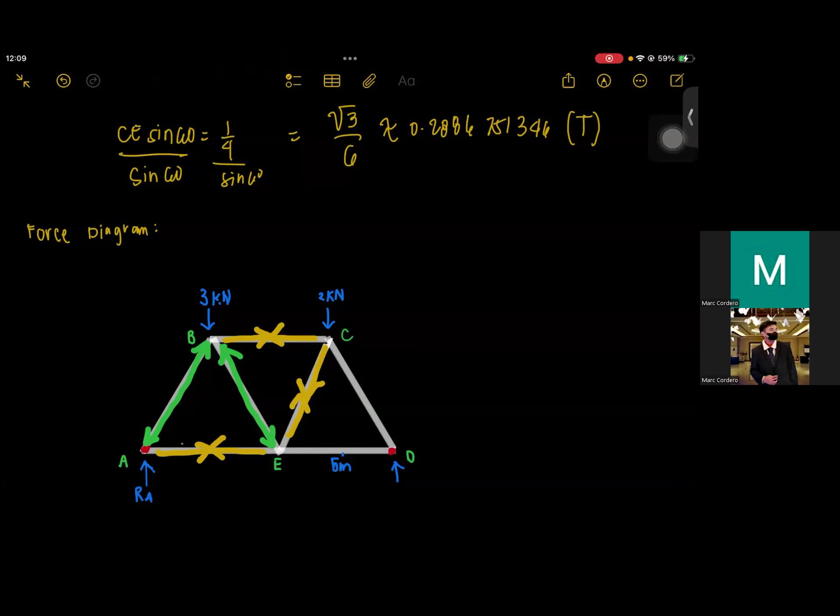Okay, at finally. CD is, I think, compression. Compression and ED, where is ED? ED is tension. So CD is compression and ED is tension.

So, that's our force diagram. Now, wait a moment. Okay?

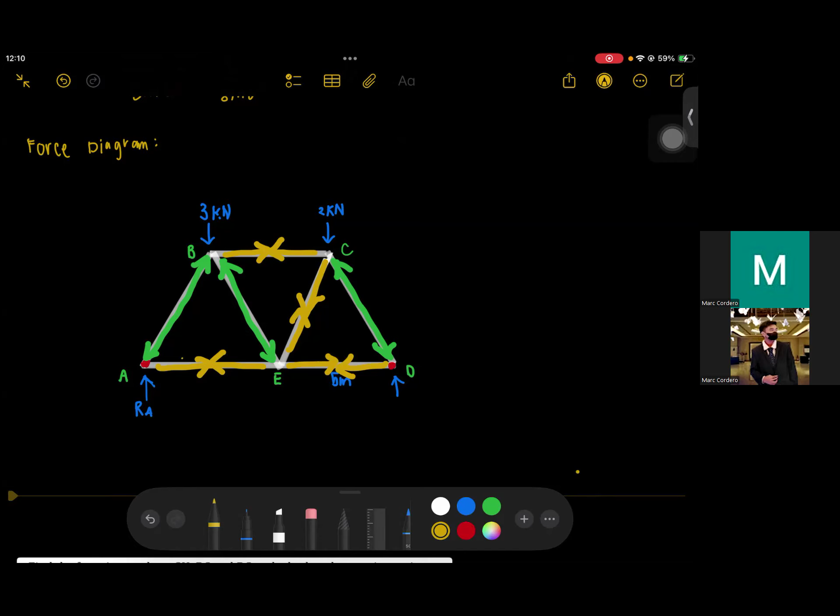So, here it says find the force in members GH, BC, and BG, and tell whether they are in tension or compression. So first, let's highlight where they are. GH is here. BG is here. And BC is here. There, they're highlighted.

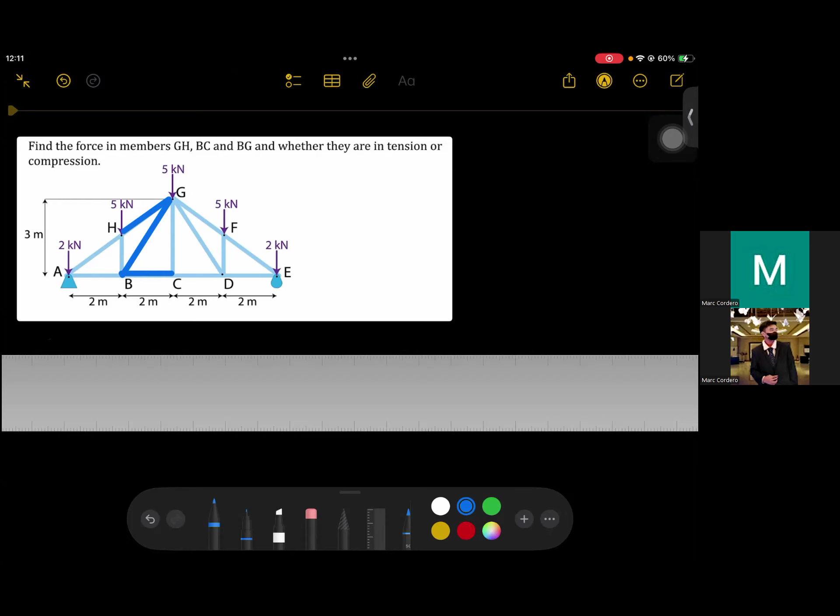Of course, in this problem, we're only asked to find several members. Therefore, that's a hint that it's better to use sections here. But it's your preference. Since we're only asked for three members, I believe it's much easier to solve using method of sections. So how are we going to solve using method of sections?

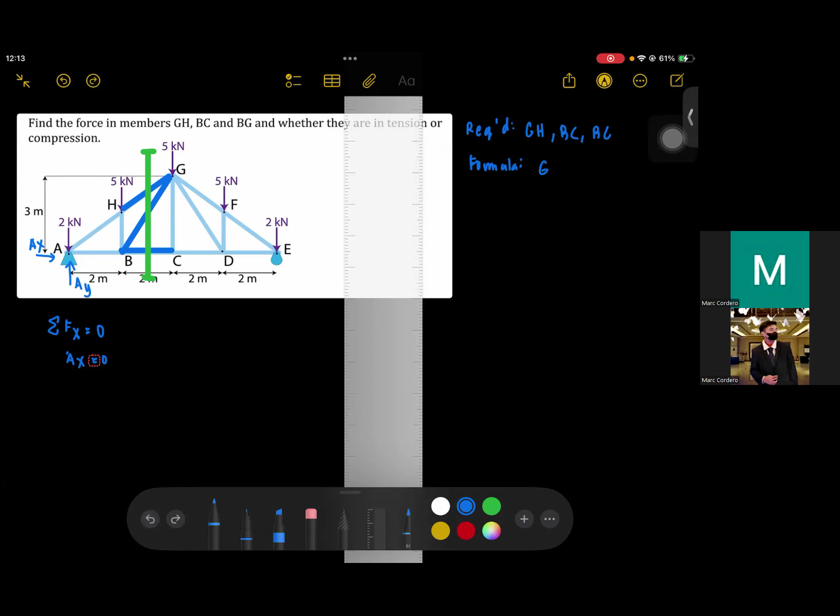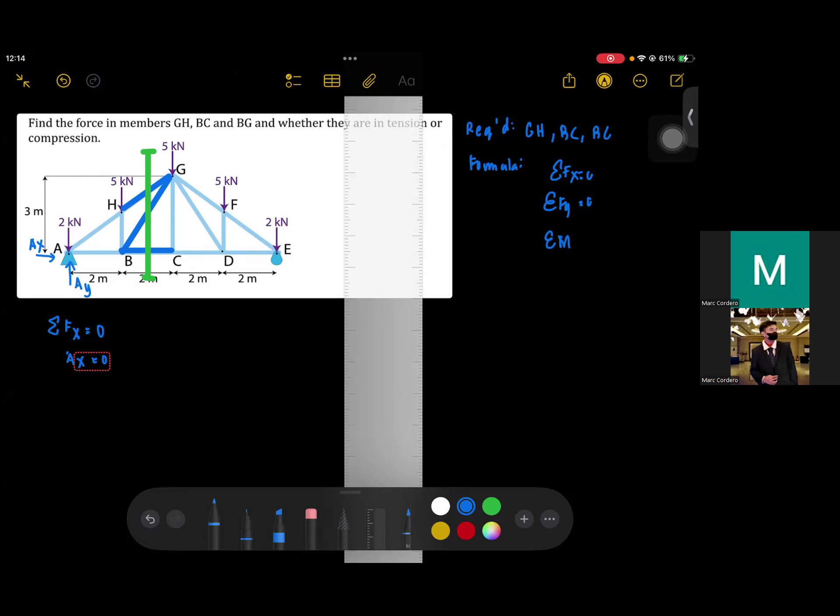Oh my God, I forgot to write the required. Sorry, required is GH, BC, and BG. And of course the formula for this is summation of Fx equals 0, summation of Fy equals 0, and summation of moment equals 0.

So, therefore with this, AX equals 0. What else? I believe it's better if I use moment and take moment at E. Because if I use summation of Fy, we'd have to consider the pin, and if I take moment of Fy, we'd also consider the roller here at E. Since we don't want to complicate things, it's better to just take moment at E so that E becomes negligible.

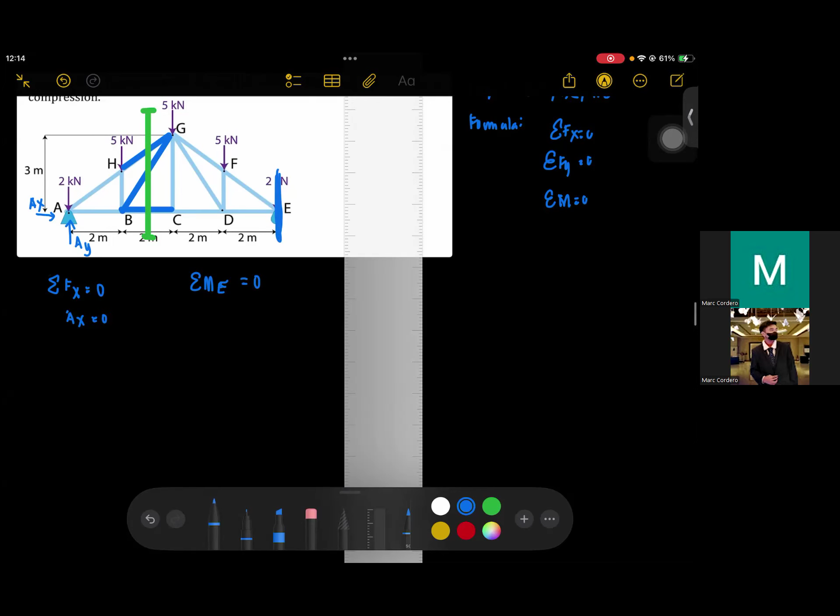Then we'll just take into account the forces that create rotation about E. So of course, AY, going up, clockwise, multiplied by 2 plus 2 plus 2 plus 2, so 8. So 8 is its distance from E.

Then we have negative 5, 6 — this negative 5 is in kilonewtons, then 6 going down, that's the distance. Then negative 5 times 4, negative 5 times 2 equals 0. Okay, now solving it: negative 30, negative 20, negative 10.

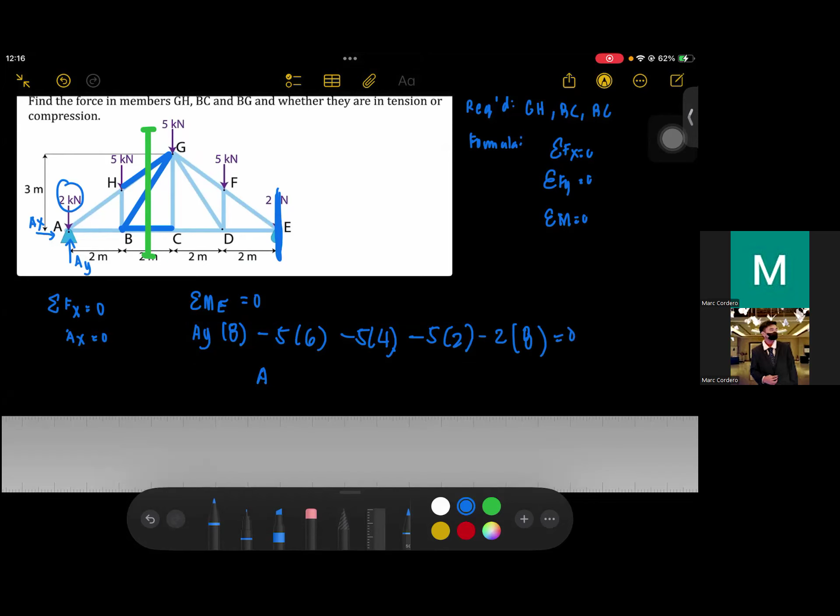I think I'm missing something. That's right, what I'm missing is the negative 2 kilonewtons going down, multiplied by 8. So plus 16, 76. 8AY minus 76 equals 0. So 76 divided by 8, AY equals 19 over 2 kilonewtons, or basically 9.5 kilonewtons.

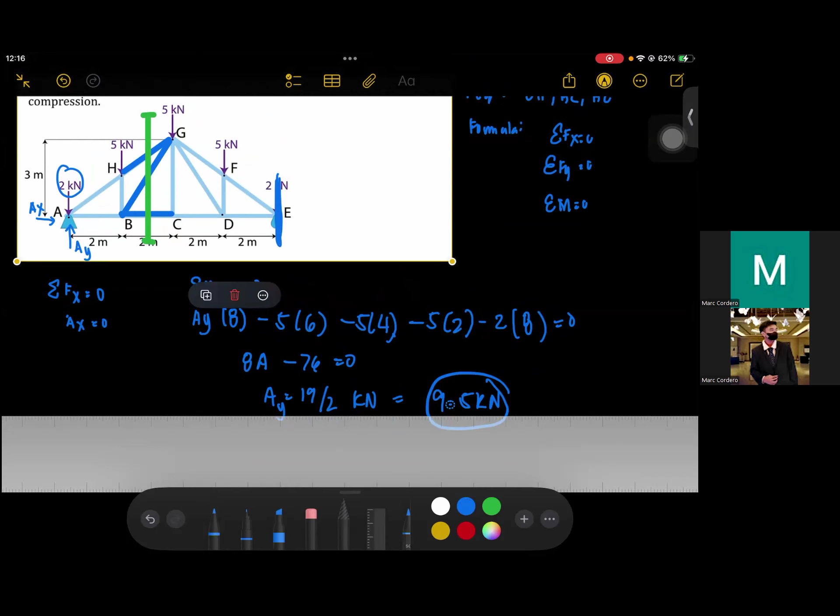Okay, 9.5 kilonewtons is AY. So now we have AY, we can cut the truss now.

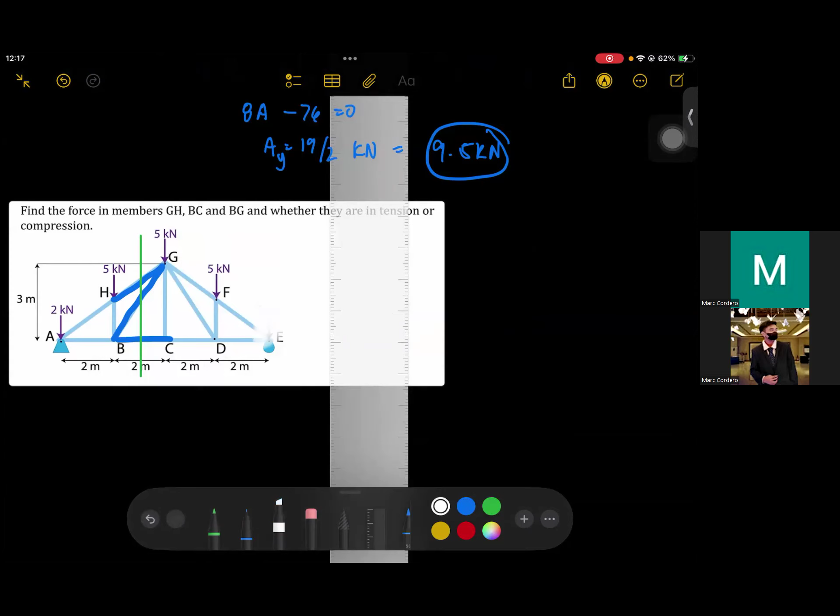GH, BG, BC. Then, there, cut. Then there, cut.

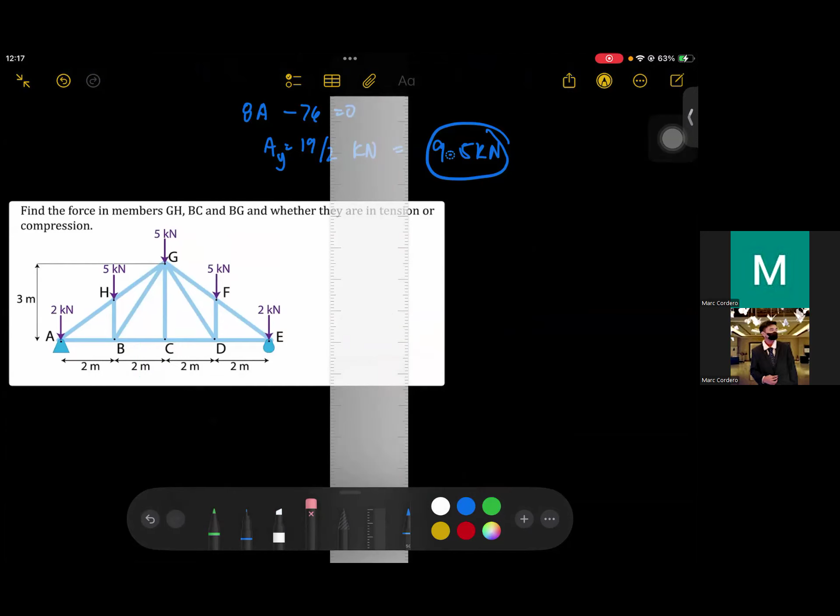Wait, let's cut it first. Now that it's cut, we can treat this as an external force.

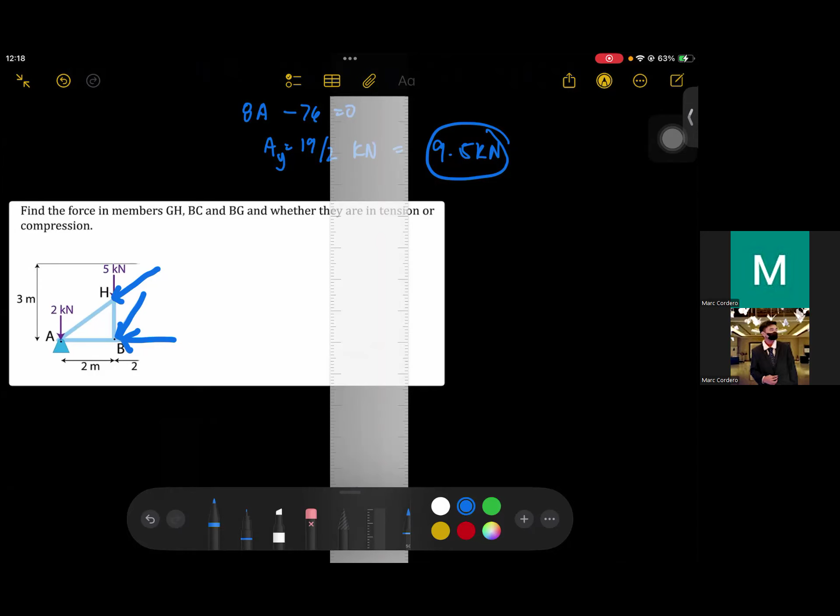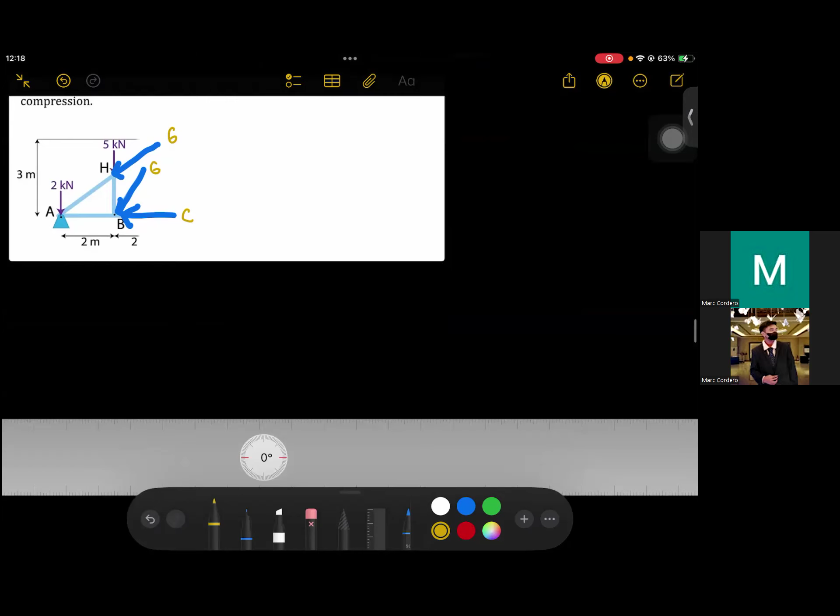But anyway, so using this: GH, then GB, and CB. Okay, now before we start, let me write the FBD. We'll draw it like this, like this, like this.

Then there — oh, just kidding. Why did it turn out like this? So, A, H, B, and this one is HG, this one is BG, and this one is BC.

Now, this one is 2 kilonewtons, this is 5 kilonewtons. Now we also have here 2 meters, then this one is 3 meters. Okay.

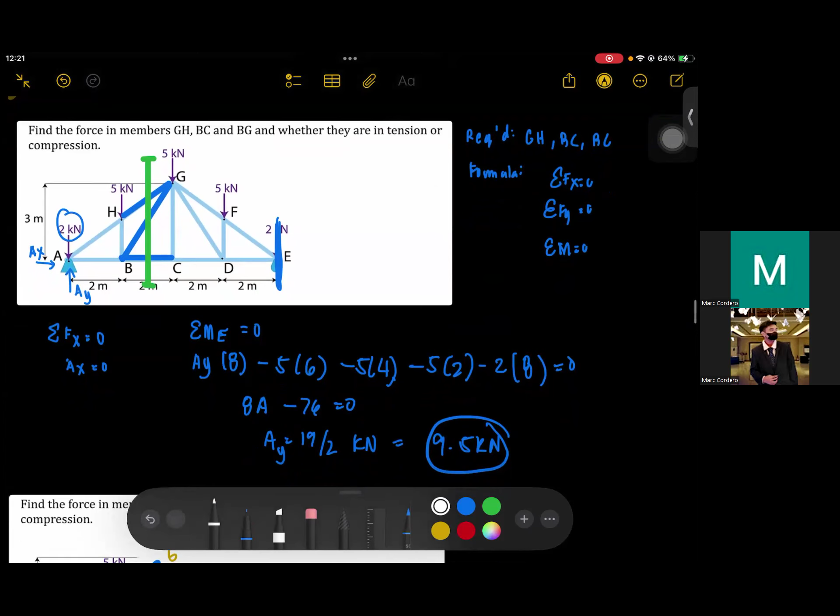Therefore the answer is... ay, wait. Let's see again. Oh, okay, wait. There was a mistake — the angle we should get is not here, but here.

That's why there seemed to be a mistake. The angle here is... this is the 3 meters, because, there, oh — 3 meters, there. So since that's 3 meters, our theta is equal to 56.31 degrees.

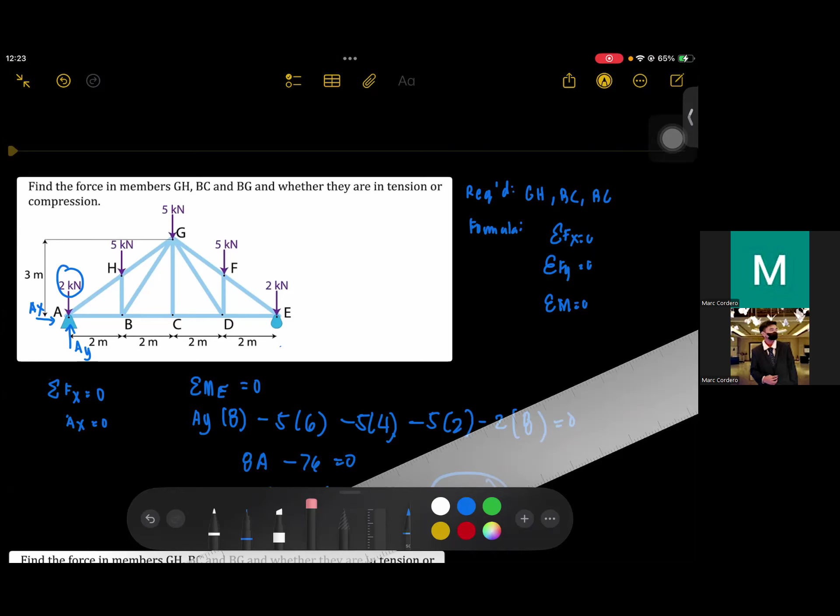Okay, wait, let me analyze it first. But anyways, okay, this one is 56.31. Wait.

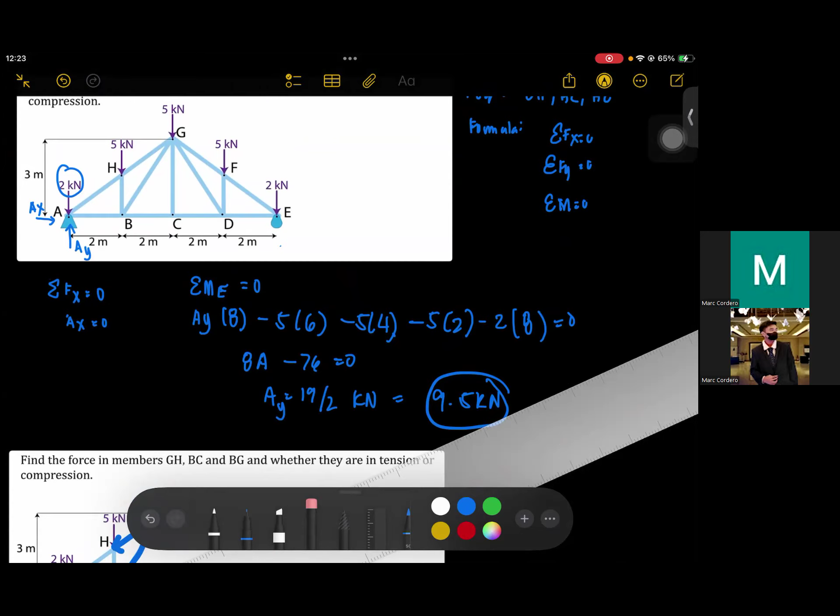2 meters. What I'm thinking for now is if you divide this here, it becomes 1.5. But we don't want to assume anything because maybe our assumption is wrong, right? So, okay, got it.

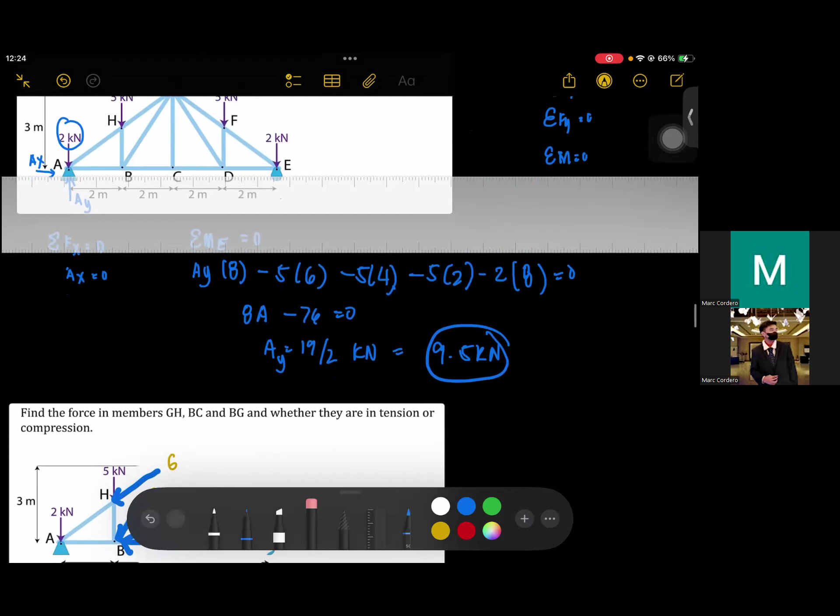So, if the basis we used earlier for the angle here is this one and this one, so this is 3 and this is 2. However, we can also use this one, this is 4, this is 3, to get the angle here, and the angle we get here is the same as the angle there.

And this angle is very important for GH later. So theta, tan theta is equal to opposite over adjacent, so 3 over 4. So theta equals tan inverse of 3 over 4. So shift tan 3 over 4, theta is 36.87 degrees. So therefore this is 36.87 degrees too, and this one is theta equals 36.87 degrees.

36.87 degrees. There.

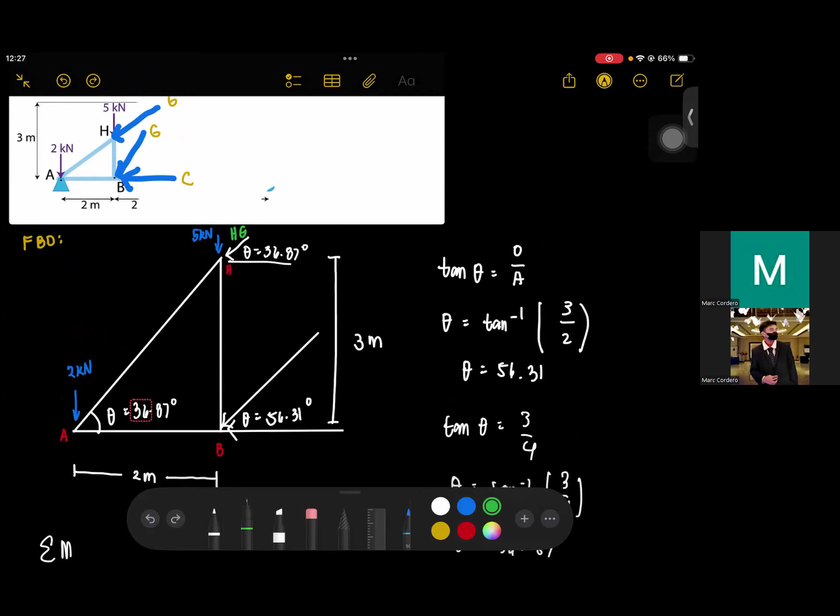By the way, this one is BG, and this one is BC. I assumed all the forces are in compression. That's my assumption, but of course it can be wrong.

So the difference here compared to method of joints, where we always assume tension, is that if your answer is positive, and you assumed compression, then the answer is correctly compression. But if you drew compression and your answer is negative, then you change the drawing, change the direction, and make it tension. So that's the difference. For joints, if your strategy is always assume tension, then your answers are based on the sign convention, which is positive or negative.

So positive means tension, negative means compression. But for method of sections, if your strategy is always assume compression, then you base it on your actual drawing or assumption. So if your assumption is compression and it comes out positive, the answer is compression.

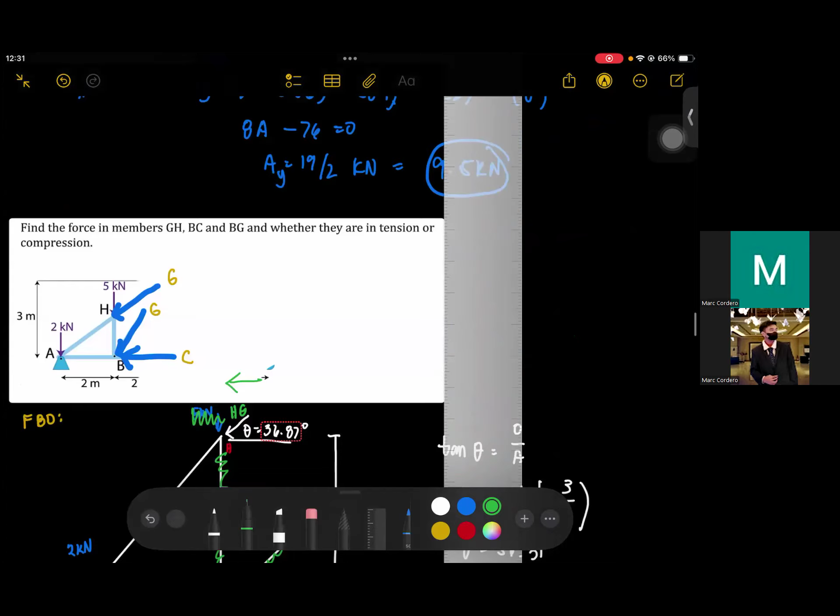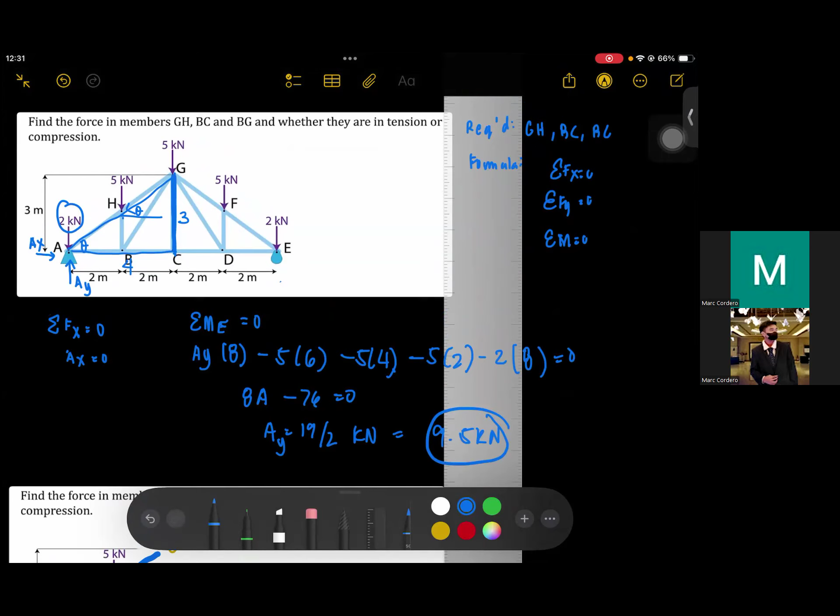well wait, actually it's not 3 meters. It's not 3 meters, this is wrong. Let's get this — the 3 meters here is actually the one from before. Sorry, I made a mistake. That 3 meters was from earlier. This one here is what's in our figure or our FBD. So to get this part, which is BH, the length of BH, we need to use trig identities again.

So using this, making it tan theta, our opposite is unknown, and our adjacent is 2. Okay, so 2 tan 36.87... the answer is opposite equals 1.5. So therefore the height here is 1.5 meters.

Okay, so using this 1.5 meters here, when it hits here, it rotates like this, counterclockwise. This one, correct, counterclockwise. Okay, counterclockwise, it becomes HG cos 36.87 multiplied by 1.5 meters.

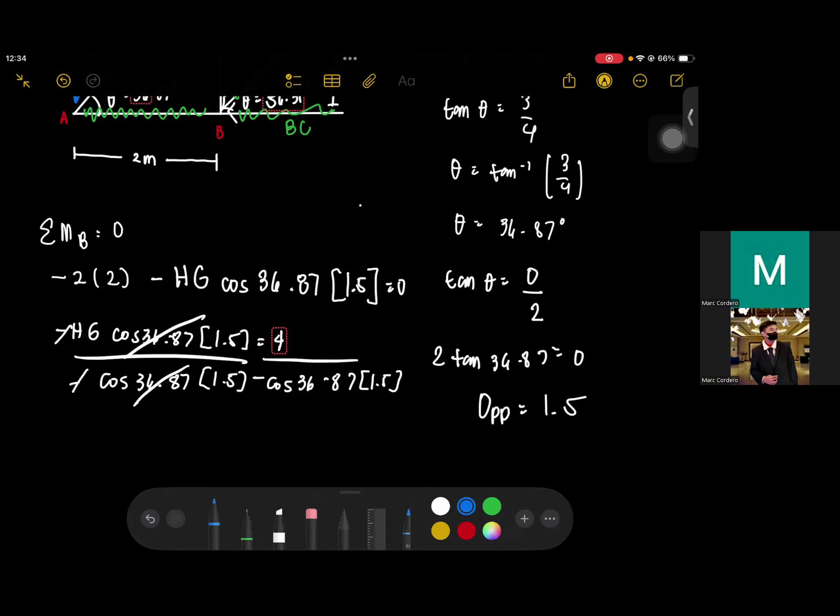I think there is a mistake in my calculation. Let me check... parang may kulang. 9.5, okay, sabi na, may kulang nga. Meron nga palang 9.5 kilonewtons na AY.

Yun yung kulang. So ngayon, kung from B, iikot natin to, it's 9.5 times 2 in clockwise direction. Ulitin natin, sorry. Plus 9.5 times 2. So -4 plus 9.5 times 2, 15.

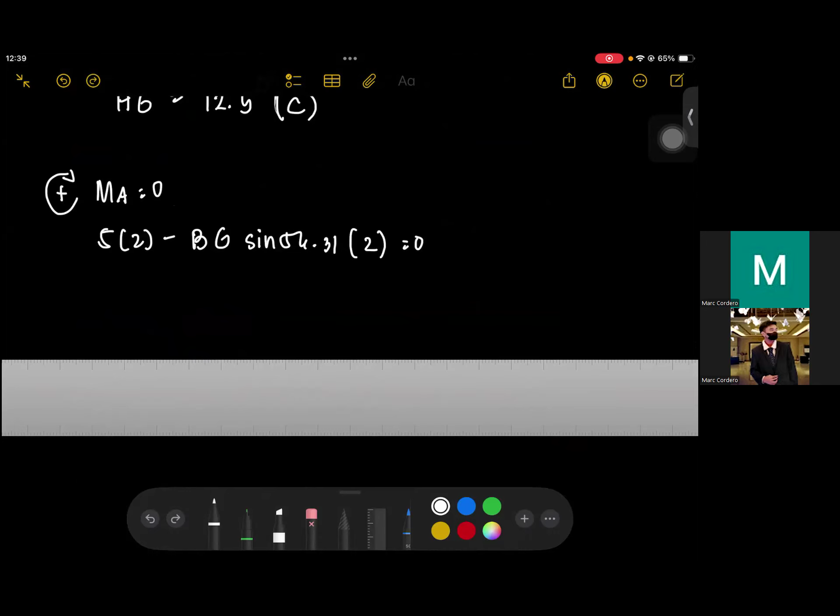Ngayon, using this, 5 times 2 minus yung BG natin, so 10. Okay, negative BG sine 56.31 times 2. Wait lang, check ko lang. So BG - hindi, in Y direction pala, no?

Clockwise. Right? So pag ganito, okay, so clockwise to. So dapat ito positive pala. So positive, so magiging itong -10. So sine 56.31 times 2 divided by sine 56.31 times 2, cancel to. So therefore magiging itong -10 divided by sine 56.31 times 2. Therefore the answer is BG is equal to -6. So -6 siya, at since negative to, at yung assumption mo is compression, therefore kailangan mo tong palitan at BG is equal to 6 kilonewtons tension.

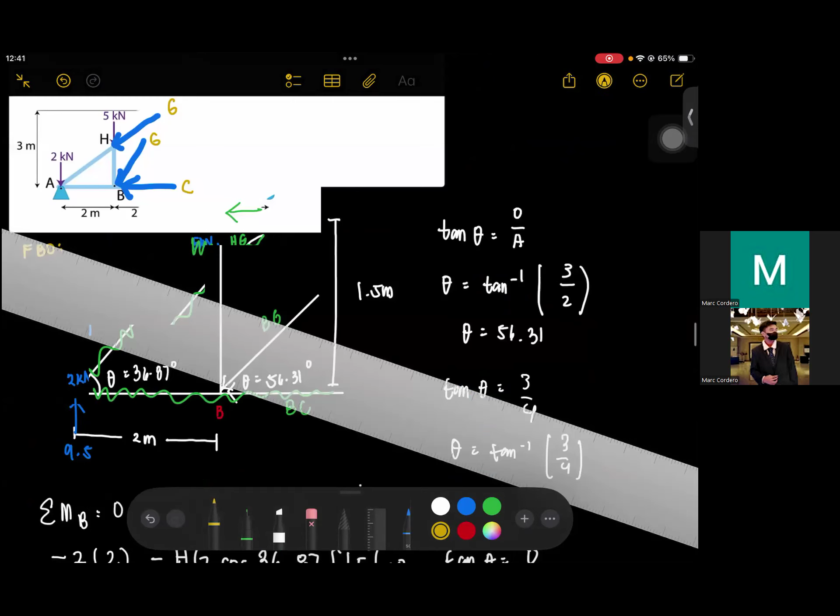Okay, so meron ka ng BG. Ako, ano ko muna, meron na tayong GH, meron na rin tayong BG. Matitira na lang si BC. Of course, ito take into account natin yung last na which is moment at H equals 0. So burahin lang natin to sa FBD.

1, 2. Tignan natin kung ano yung mga magiging negligible kung mag-moment tayo kay HG. So kung mag-moment tayo kay HG, of course, ito ay mag-moment tayo sa H. Maging negligible yan, magiging negligible rin ito. Tapos magiging negligible, hindi na siya maging negligible. So yan, so yung mga magagamit nating forces dito is yung 2 kilonewtons, 9.5 kilonewtons,

yung, of course, BC at yung BG. And sa BG, yung iti-take into account lang natin ay yung nasa X component. Kasi yung sa Y component ng BG, tatamaan niya yung B. Since tatamaan niya, magiging negligible siya. So using this, no, MH

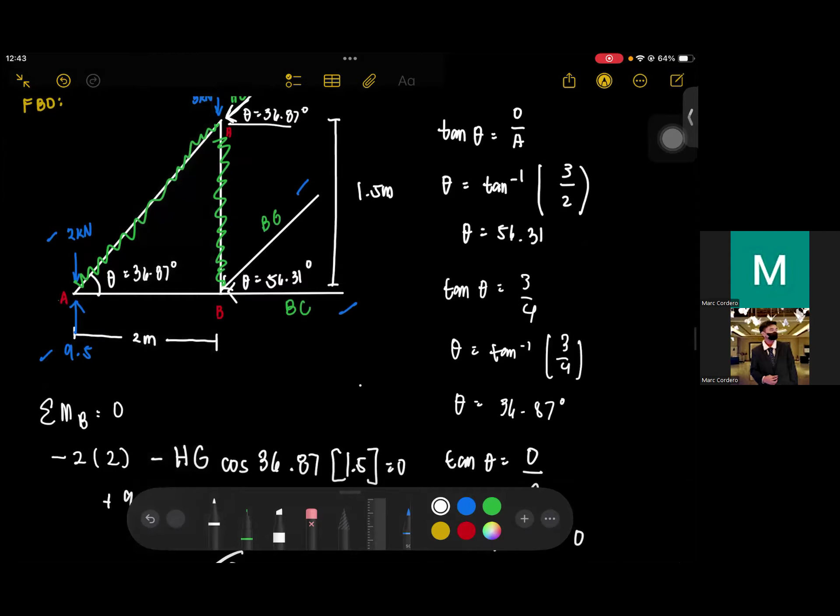9.5 clockwise, 2 kilonewtons counter, tapos BG to the left, BG to the left, clockwise, tapos BC, counter, negative BC, okay? So taking into account all, so 9.5 multiplied by 2 minus 2 times 2 minus yung BC multiplied by 1.5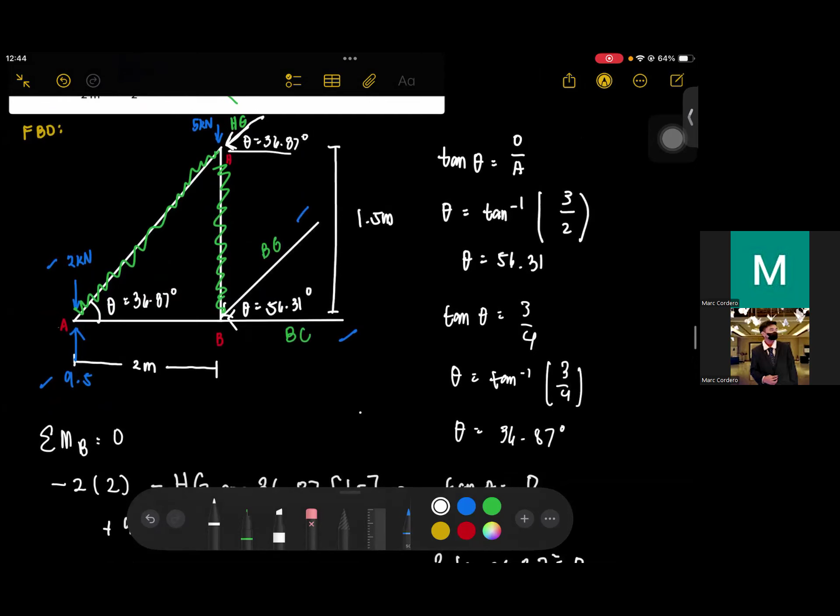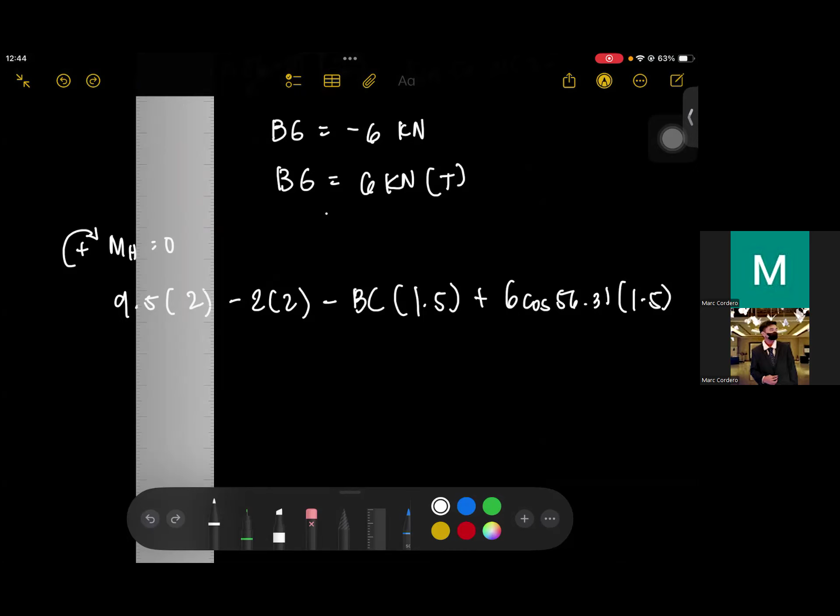plus 6 - yung 6 is yung BG - 6. So ulit, positive 6 BG, BG cos 56.31 times 1.5, which is, diba, ito x to, tapos ito y distance. So equal 0 na lang natin here.

So actually, ayan, gagamitin mo pala niyan dito is negative plus negative. Bakit negative? Kahit ito yung ginamit natin, dapat kung ano yung originally na nakuha mo, yun yung gagamitin mo para there will be no confusion and wrong answers. Gamitin mo yung answer mo bago mo siya i-convert into tension or compression.

So ito, 0 equals 9.5 times 2 minus 2 times 2, 15. Tapos negative 6 cos 56.31 multiplied by 1.5 is negative 4.99229. At si negative BC multiplied by 1.5. 15 minus, magiging siyang 0 equals 19.99 minus BC 1.5. So lilipat ko to, BC 1.5 equals 19.99 divided by 1.5, cancel, BC is equal to, divided by 1.5,

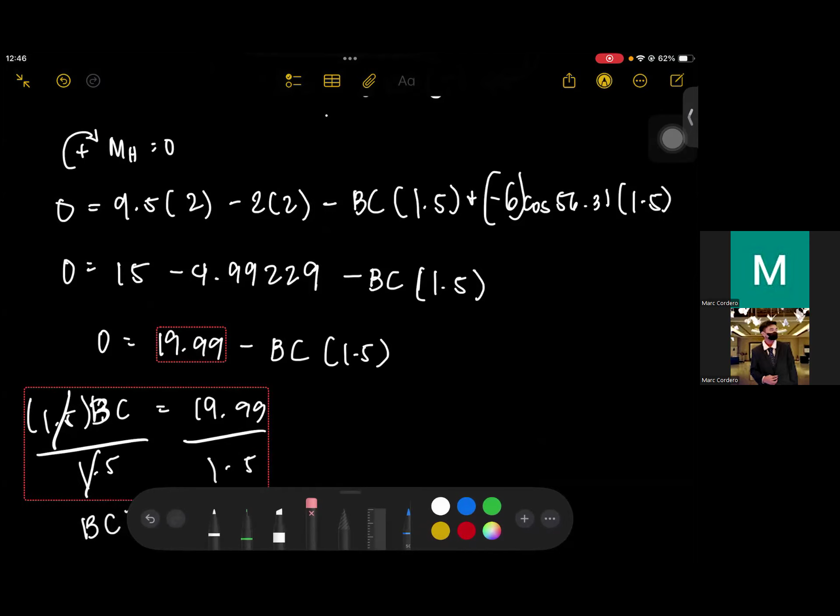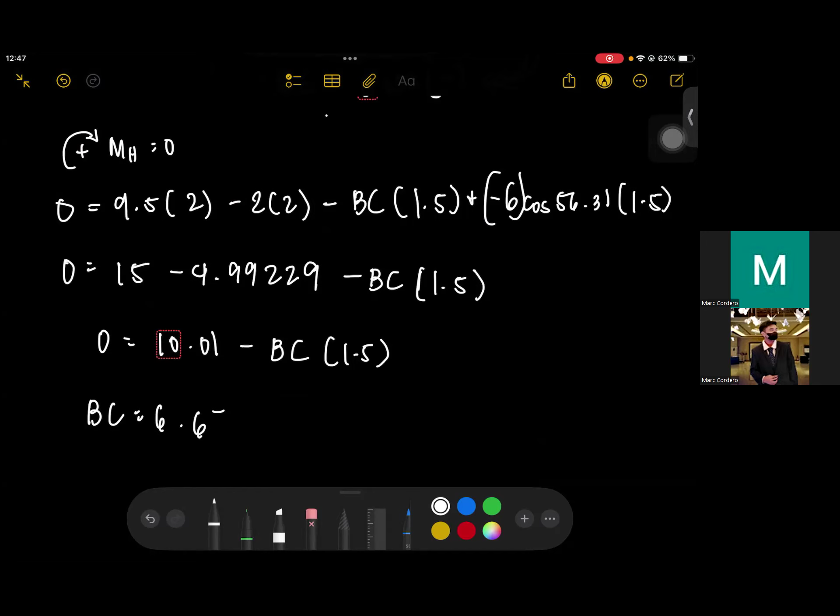it's equal to, wait lang, recheck, 9.5 times 2 minus 2 times 2 minus 6 times cos 56.31 multiplied by 1.5. So okay, mali, it's 10.01 tapos divided by 1.5. Ayun, so therefore BC is equal to 6.67 kilonewtons. And since positive to at yung dinrawing mo is compression, therefore this is compression.

Okay, so that's it. Yun lang yung sa methods of sections and methods of joints. Gusto ko pang actually magbigay ng problems, pero I guess magkukulang na tayo sa time since it's already 12. But,